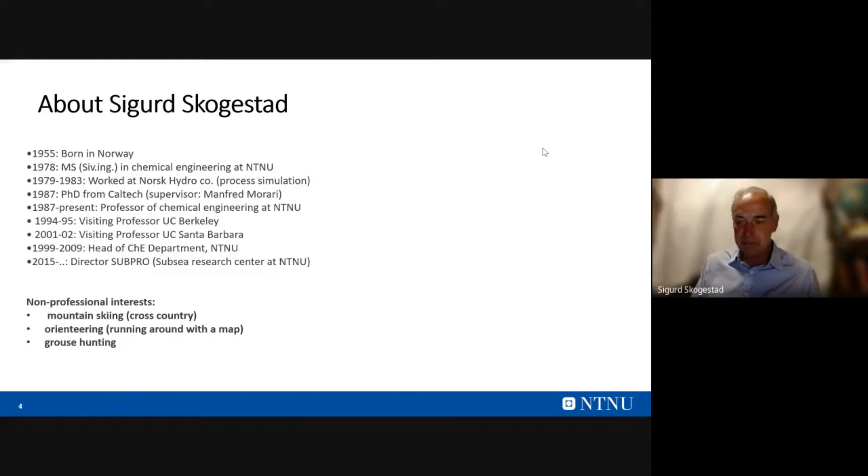Anyway, let's get into the talk. I have my homepage, which has been running since 1996, still running. There you can find one quote from me: that the goal of my research is to develop simple yet rigorous methods to solve problems of engineering significance. That has been my goal for my work, to combine theory and practice.

Now, what I present today, I think, is not really so much in the wrong direction. It also makes use of a lot of things that have been presented by people in control theory.

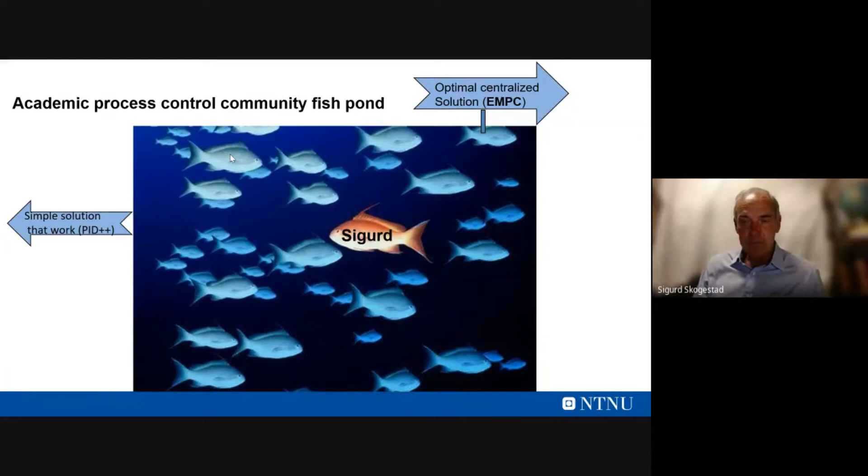So, to introduce the topic, I've observed from industry that they frequently use model-based calculation blocks, and they also use a lot of cascade control. But when I look at what they've done and ask them why, they don't have a good answer.

There's not really any theory behind a lot of the things they do. So I've been searching for this theory, to make it easier for engineers to use the right things. One idea is to use nonlinear model equations to derive control strategy, to derive control structures with embedded knowledge through input transformations.

This is very much related to what's called feedback linearization, a nonlinear control theory that became popular around 1990. It has not been used a lot in process control. So the primary use of what I present today will be in nonlinear feed-forward control, nonlinear decoupling, and also insight into how to use cascade control.

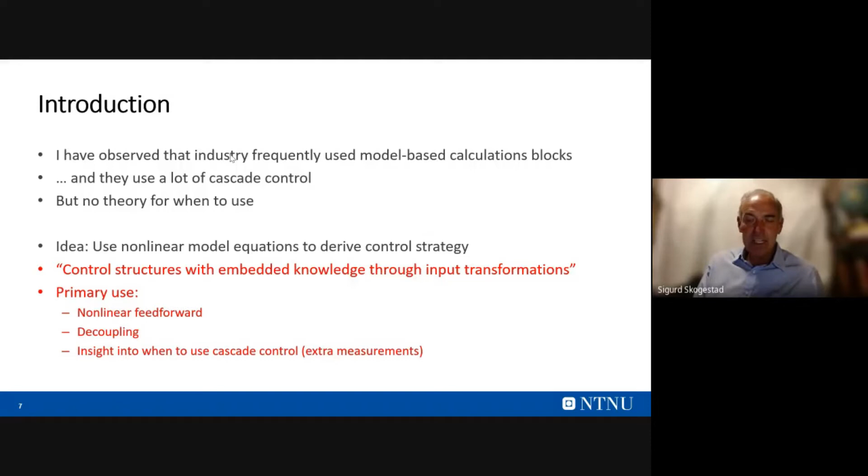Now comes a slide I think is very important. It gives you essentially the main idea of everything, so I think you should concentrate on this slide and try to understand what I'm doing here. If anyone has any questions, they can ask about this one. The main idea is really trivial, but it's almost magic.

Assume that you have this process given in red here. You have a nonlinear dynamic model: dy/dt is a nonlinear function of the output y, the input u, and the disturbance d. Now what you do is introduce some transformed inputs called v. So the original inputs are u, and I make some transformed inputs v, simply equal to the right-hand side of the model equations minus a times y.

A is a tuning parameter. You can select it equal to 0, then you get feedback linearization, but more generally it should be non-zero. So if you introduce this simple transformed input, you get your new transformed system, shown by the blue box here.

This is the transformed system after introducing this input transformation, and it looks like this: dy/dt equal to ay plus v. So if you look at this system, first thing, it's linear, it's first order, it's going to be decoupled if A is diagonal, and it's independent of disturbances.

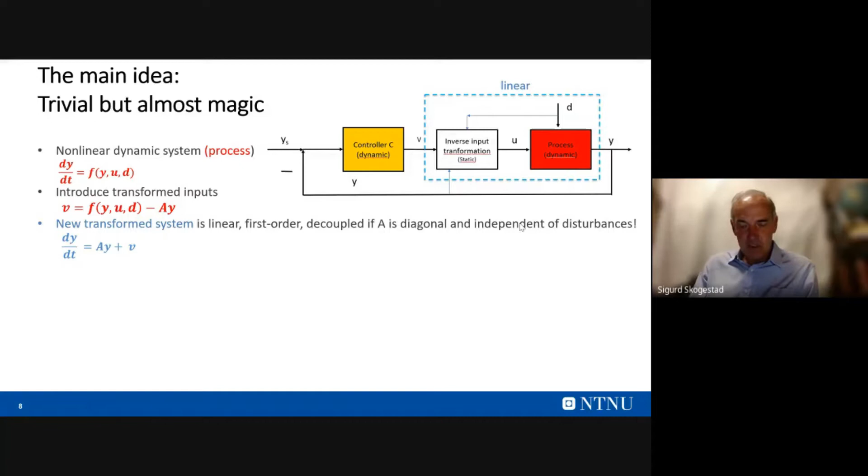So it's, as I said, almost magic. And how do you make this work in practice? Well, you need a static calculation block, this block here, which from a given value of v, from a measured value of disturbance, also based on the measured value of y, will compute the input.

And that's really just inverting this equation here. So you need to invert this equation for the transformed input. You have given v, you measure y and d, and then you can calculate u by solving this equation. We'll get back to how we can solve these equations - it can be analytically, numerically, or by feedback.

The value of v, that comes in here, is computed by a conventional controller, often a linear controller, for example a PI controller. And for perfect disturbance rejection, you don't even need this controller - you can just keep v constant, and then you can see from this equation that you have perfect disturbance rejection through this static calculation block here. So it's almost magic.

There are some assumptions. Of course, the first most obvious assumption is that you need to know the model, and you need to measure the disturbances. That's not often the case, but if you cannot measure all disturbances, it can still be useful - we'll see that. Another restriction is that you need as many outputs y as you have inputs u. So clearly this is restrictive, but we will lift this restriction later.

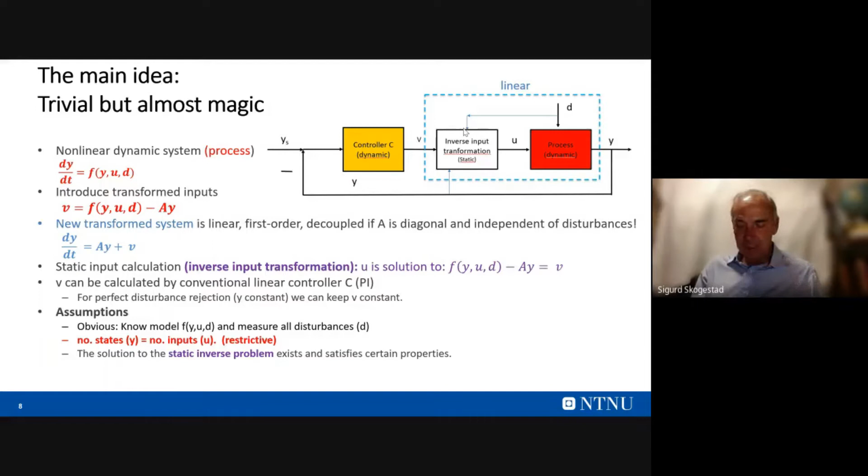Okay, so this is really the main idea. It's almost magic: you do this transformation, you have perfect feed-forward control, and it's very similar to feedback linearization, introduced by Isidori in the 80s.

You can see it's essentially the same thing. The only difference is that in feedback linearization, usually this function is assumed to be linear, affine in U, and also usually A is made equal to 0, so you get an integrating system. The name for this is feedback linearization, which I think may be a bit misleading given what it's actually doing. Maybe a more descriptive name would be nonlinear static feed-forward control and linearization with a little feedback.

But feedback is not really the main thing here. The feedback is this y, but that's not the main component in this inversion. The system is mainly linearized by static inversion of the nonlinear model f, and the most important property, probably for practical use in process control, is that it eliminates disturbances in a nonlinear way. Feed-forward control is not used that much in process control, and one important reason is nonlinearity, but this approach will actually correct for nonlinearity. Yes, there is some linearizing feedback from y, but not necessarily a lot.

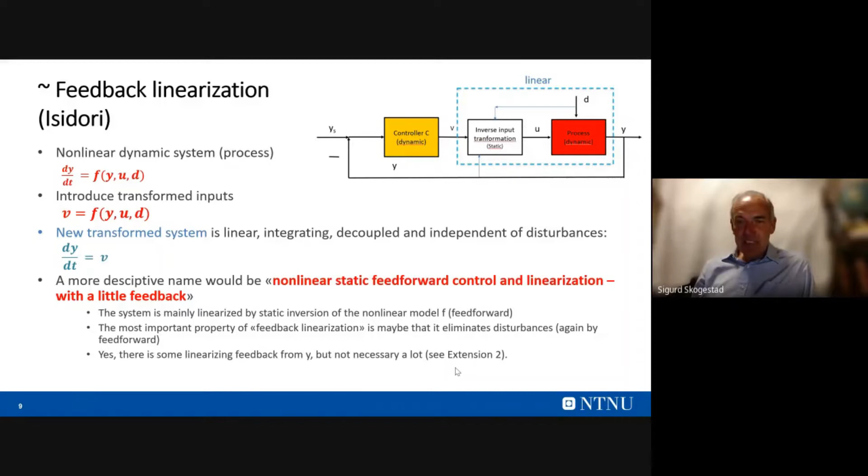Let me look at these extensions that we have done compared to feedback linearization. The first extension is that we looked at a more general function for the right-hand side. Normally in feedback linearization it's assumed to be linear or affine in the input, which seems a bit limited, but this assumption is not really necessary. It has some advantage when you do it this way, because then you can explicitly find the solution to this inverse, at least for the scalar case.

But in this talk we will use the more general function, and the transformed input will be, as I said before, the right-hand side minus A times y. We may need to solve this numerically rather than analytically, but that's not really a problem. Actually, I wrote an email to Isidori and asked him about this, and he said that originally they did allow for more general right-hand sides, but for some reason they made this assumption in the paper. I think he agrees it's not really necessary.

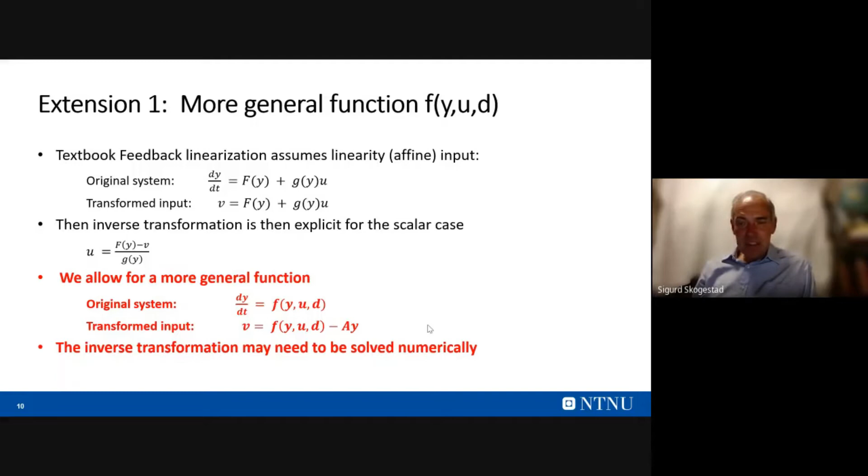The second thing which has puzzled me a bit is why they transform into an integrator. This is done by choosing A equal to 0. But if you think about what it's doing, it doesn't make too much sense, because by choosing A equals 0 you make this linear transformed system into an integrator, from v to y. This is how it looks: dy/dt equals v, a pure integrator.

The disturbances are eliminated, but if you think about what you want to do afterwards, you're going to design an outer controller. You need this outer controller also because there will be disturbances you don't measure, and there will be model error. You will need feedback from the measurement y compared to a set point, using conventional PI control to do this.

Correction for uncertainty - so what you will do, if you make it into an integrator, assuming you have a fast process and want fast control, is first use positive feedback essentially to make this system integrating. Then after making it integrating, you use fast negative feedback to move the dynamics back again, maybe close to where they originally were. So it doesn't really make sense that you first move it into the integrator and then move it back again. I think this is a limitation which is not really necessary.

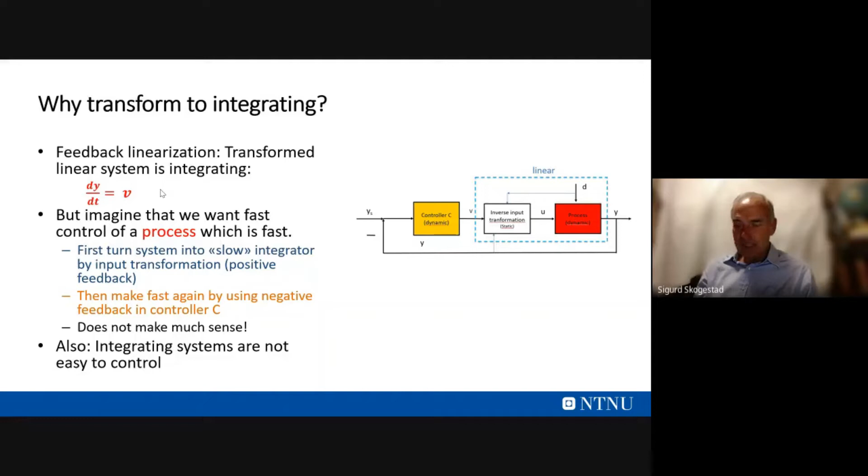So the second extension is to introduce this tuning parameter A. As I showed before, this is the original system - transformed input vA, and you get the transformed system, which is linear and first order.

So A can be used to get the desired dynamics, and the system will be decoupled if this parameter A is diagonal. A equal to 0 corresponds to feedback linearization. But one general idea is to select A equal to the derivative of f, the right-hand side, with respect to y at a nominal operating point, because then nominally the transformed system has the same dynamics as the original system, and there is nominally no feedback from y into this input calculation block. So this might be a good choice.

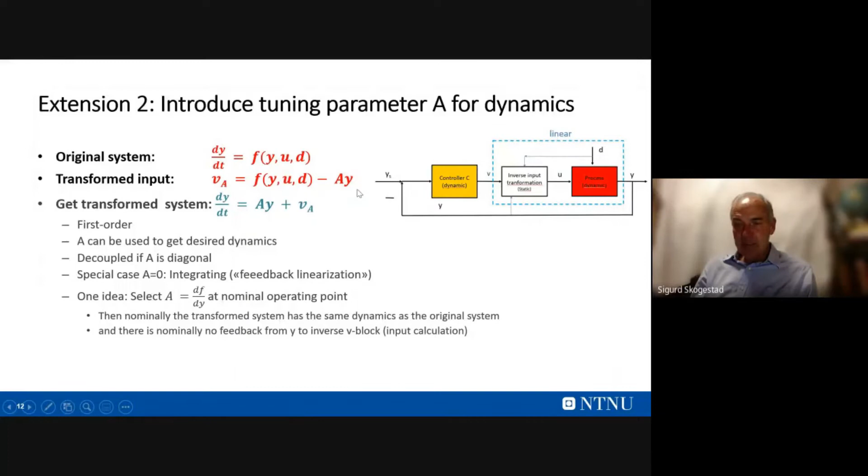But you can also use it to speed up the response and get any dynamics you want, really. Except, of course, you need to be careful if there's delay in the measurement and you speed up the response too much, you can have problems with instability.

There's a closely related transformation that we presented at the IFAC World Congress. Instead of taking V as F minus A times Y, you multiply this by minus A inverse and get the transformed variable, Y minus tau 0, which is minus A inverse times F. Then you get a transformed system in time constant form. The difference now is that with this transformed variable, you always have a steady state gain of identity matrix, which means that at steady state you have Y equal to VA0.

So it's very similar, but it has the advantage at steady state of making the steady state gain identity. Then we may, in theory, avoid the feedback controller completely. But that's only if you have no model uncertainty and you have measured all disturbances. Again, as I said before, the feedback control is needed to correct for model errors and unknown disturbances. But in theory, with this related transformation, you can get away with the outer feedback controller C completely.

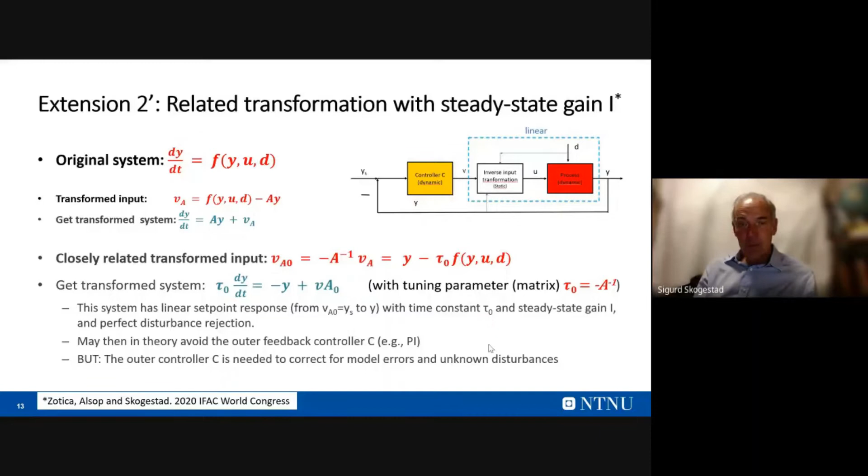So then another extension compared to feedback linearization is to consider static systems, which are actually very important in process control. For static systems, you typically have a set of nonlinear equations, and you select maybe one or a couple of the states X as outputs. This is very common, and it's not covered by the normal theory of feedback linearization.

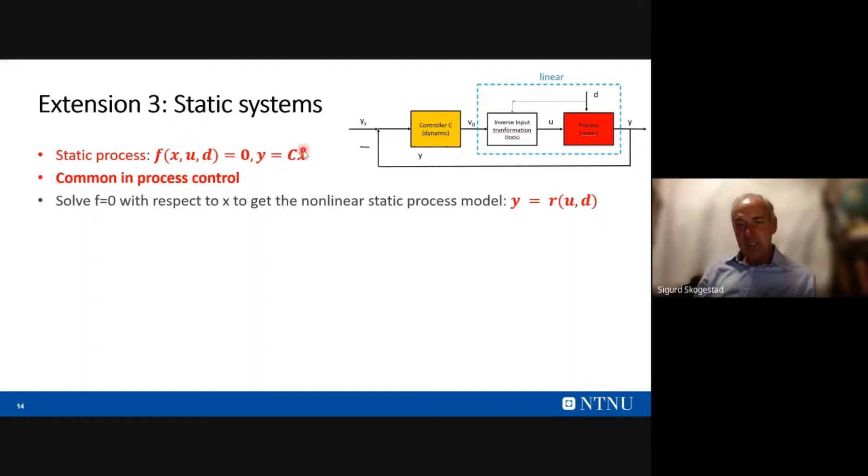But it's actually very simple to handle these systems in a similar way. What you can do is solve these equations with respect to X, eliminate the X's and substitute them in, and then derive the relationship directly from U and D to Y. You can write the equations in this form. Now all you need is to introduce R as your new transformed input, V0, and the new transformed system is going to be linear, static, and independent of disturbances. So the new transformed system is just Y equal to V0.

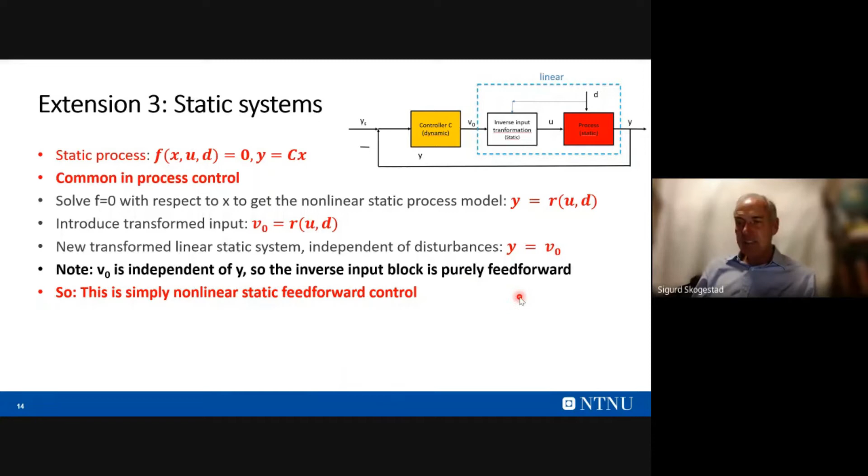This is similar to what we did before, but with a static system. What you note here is that this V0 is actually independent of Y — there's no arrow from Y into this block. So the inverse input block is actually a purely feed-forward block. This is really simple nonlinear static feed-forward control, which people have applied many times before. But I'm just putting it into the same setting as feedback linearization.

Of course, we need to assume that the solution to this static inverse problem exists and is unique, but this is usually satisfied for physically real systems. And if you have problems solving them, I will talk about an extension later, which is a trick to solve the equations by feedback instead of numerically, using an I controller, a purely integral controller. This may actually be a safer approach in many cases, because it's like a continuous solution of the equations.

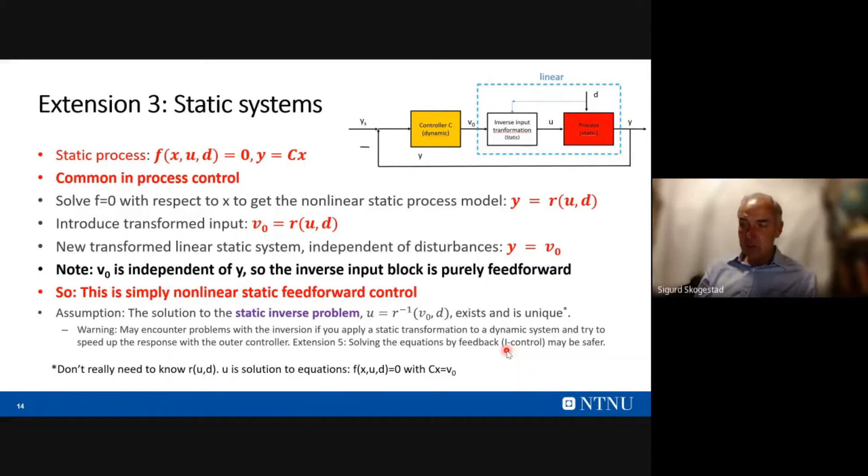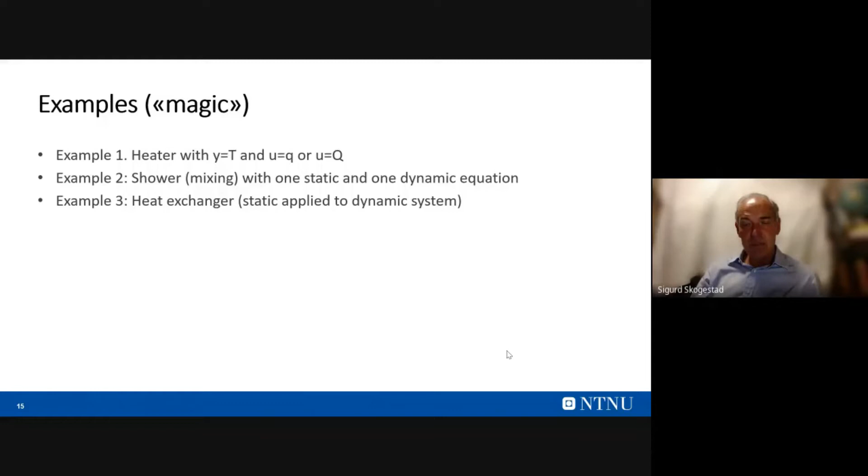Okay, so then let's look at some examples. I call this magic because you're going to just get some fantastic responses here. Look at three examples: first the heater, a scalar case, then an example with two inputs and two outputs, and finally a static model, a heat exchanger.

But let's look at the other choice of input, another one. That's going to be the heat input. So here you get this expression for the inverse. This is always well behaved here.

You can see that the input will depend on the value of VA computed by the controller. And so disturbances here will be the Q and T0. There will be some correction, essentially feed-forward action from disturbances into the input Q.

Now let's look at some simulation for the second case here. So the input is equal to the heat, and I want to control the temperature in spite of disturbances in the flow in and in the temperature in.

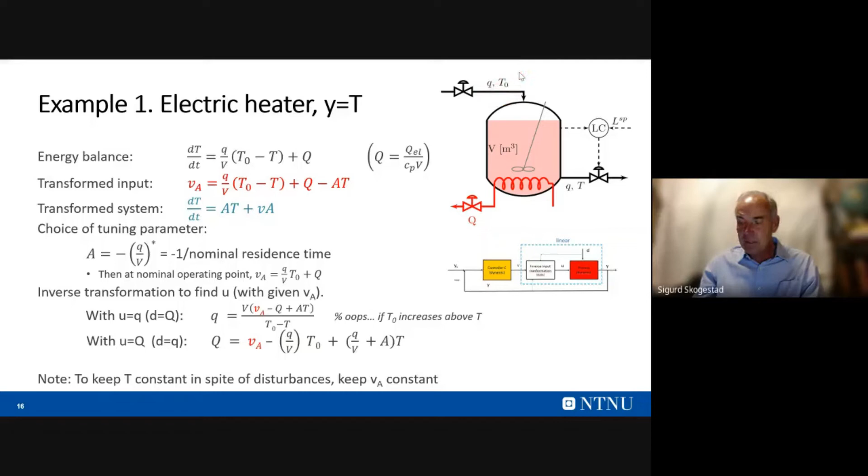So here I'm showing you the simulations. We have first a disturbance at T equals 100. There's a disturbance in T0, and you see VA is kept constant because we want to keep a constant temperature.

So VA, we're not using the outer controller at all. This is showing you that it doesn't use the outer controller at all here, but it changes the heat input based on just the feed-forward action from T0. And the temperature is kept constant.

So then at T equal to 2000 here, we have another disturbance. That's a disturbance in the flow rate into the tank. Again, the flow rate goes down to half its value, and heat input goes down to half its value, just by feed-forward action from this expression here.

This is the inverse input block. Finally, at T equal to 4000, I make a set point change, and then I'm actually using the outer controller to do this, to generate a change in V. So that's the change in V generated by the outer controller.

And this is the corresponding input you get, and this is the temperature. So you can see it's almost working like magic here. It looks almost too good to be true that the temperature is completely constant and the VA is constant.

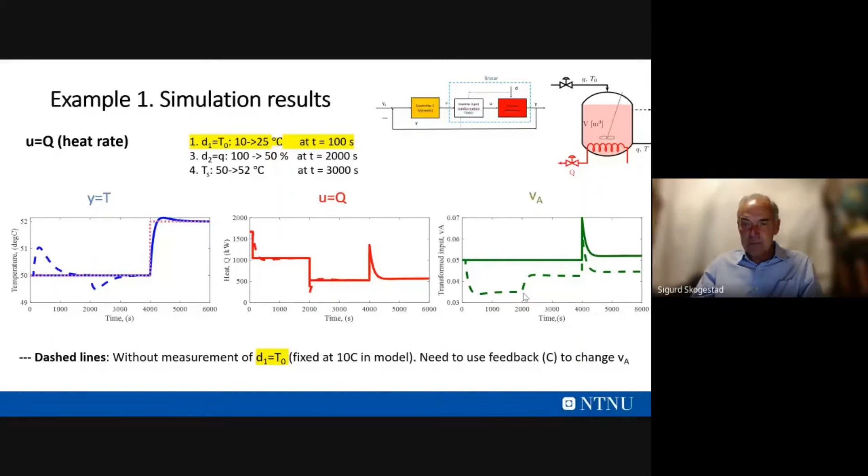Okay, so this was example 1. Let's go to another example. This is an example of a shower where we mix two streams to control the temperature of the mixed stream and the flow of the mixed stream. The input is the flow of stream 1, which can be the hot water, and the flow of stream 2, which could be the cold water.

So the mass balance is assumed to be static here. So this volume is constant. As soon as you put something in here, it comes out there. So it's a static mass balance. The total flow is Q1 plus Q2. The energy balance is dynamic, and this is just an energy balance here by mixing two streams.

So here we can define one transformed input for the static equation, just as the right-hand side here, and one equation for the dynamic equation as the right-hand side minus A times T. And A again is going to be equal to minus Q divided by V, the nominal minus 1 of the nominal residence time. So if you take these two equations, they are coupled, but you can solve them with a given value for V0 and VA, and find Q1 and Q2. So Q1 is this expression, and when you found Q1, you can put it into this one and find Q2.

So here again you see some problem with possible singularity if T1 is equal to T2. But of course it makes sense - if you have T1 equal to T2, there's no way you can control the temperature, since you have the hot and cold water at the same temperature. So it's not really a limitation in the transformation, it's more a limitation in the system itself. But of course you have to look out for things like this.

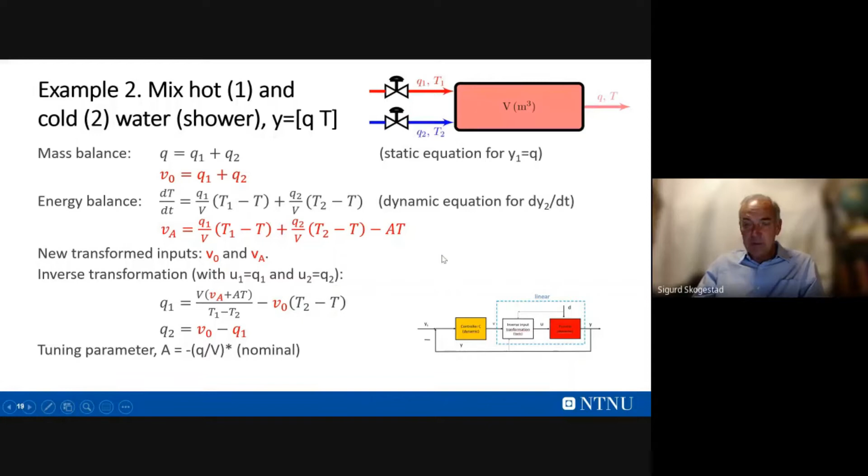So let's look at how it behaves in simulation. Here's the simulation with transformation only, so we're not using any feedback controller on the outside here. You can see we have disturbances first in T1, the temperature of the hot water, then the disturbance in the cold water, and then we make a set point change in the temperature of the outstream and the total flow. The way we do this: for 1 and 2 we keep V0 and VA constant, and for 3 I make a step in the VA, and for 4 a step in the total flow V0.

And you can see it's behaving wonderfully here. So we have the disturbance - this is how the hot and cold water is changing. The temperature remains constant for all the disturbances. And when you do this step change, this is the flow - total flow remains constant, and the temperature remains constant.

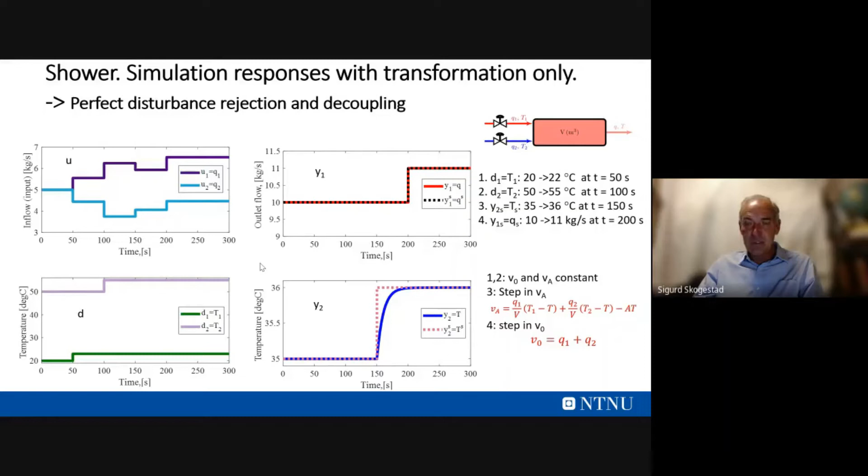This is for the step change in temperature, and you see it follows the residence time of the system. The flow is changed immediately when you make a step change. So again, this is working wonderfully. Now you might wonder how well it behaves if there's uncertainty, but we have looked at a lot of cases with uncertainty, and it behaves surprisingly well. Of course if it gets too much uncertainty it will not work that well, but there's no big surprises that we have seen so far.

So then let's look at the third example of a heat exchanger, a static one. This is just a heat exchanger that is countercurrent, and we want to control the outlet temperature using the flow of cold water to control the hot water temperature. Now the equations here are actually very nonlinear, especially if the cold water is the input - you see it enters into some exponents here. So this is the expression for the hot temperature.

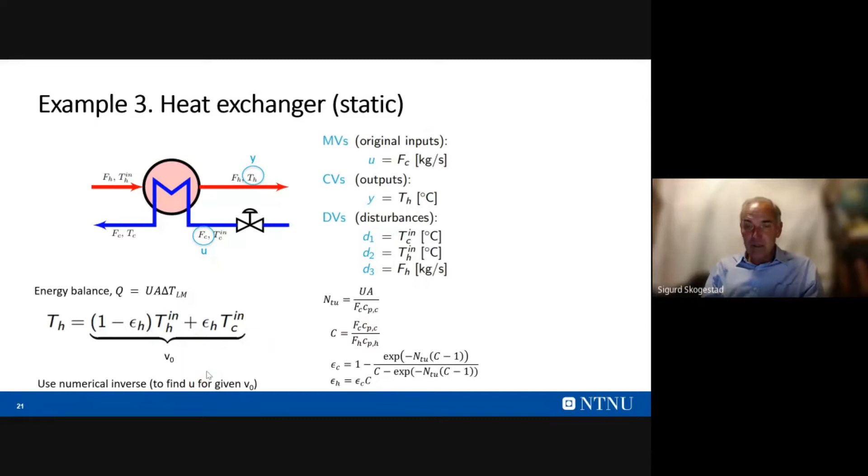This is sometimes called the epsilon NTU model. This is actually a very nonlinear model, and it's not easy to solve. So what we did, if we're given V0 and we want to find this FC, we solve these equations numerically.

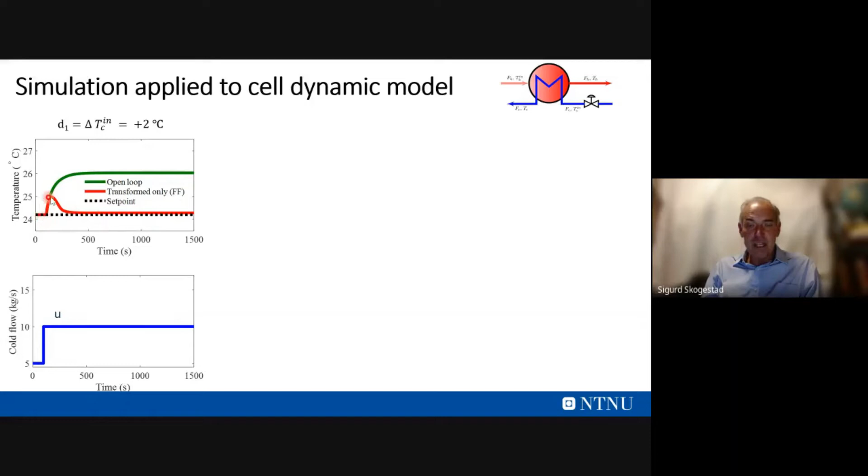I'll show you how it works when we apply this to the dynamic model. This is essentially static feed-forward control, nonlinear feed-forward control. Here you see for a disturbance in the cold water temperature, the temperature goes back again. Essentially, it's reacting immediately based on the feed-forward action. The reason temperature doesn't stay at its desired value all the time is because we're applying it to the dynamic model, and there's some steady state offset because the dynamic model isn't quite equal to the static model. In the static model we assume delta T log mean, but the dynamic model is a cell model which doesn't quite follow delta T log mean. But you see it's behaving very nicely, as you would expect.

Here's for a disturbance in the TH in. So here there's a bit of delay. You have a disturbance here, and it will take some time before it affects this one. But the feed-forward control is changing it immediately. That's why we're getting this inverse response, or wrong response, in the temperature. Otherwise, it's behaving very nicely.

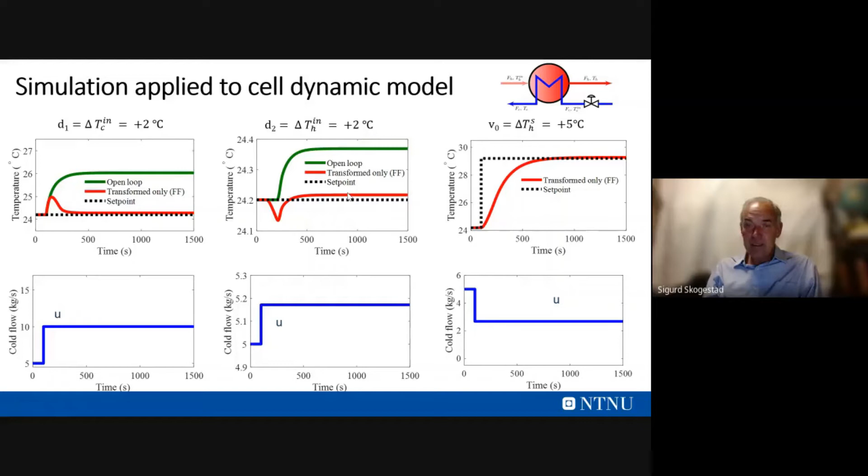And finally, here's a set point change. This is using the outer feedback control, and it's behaving nicely.

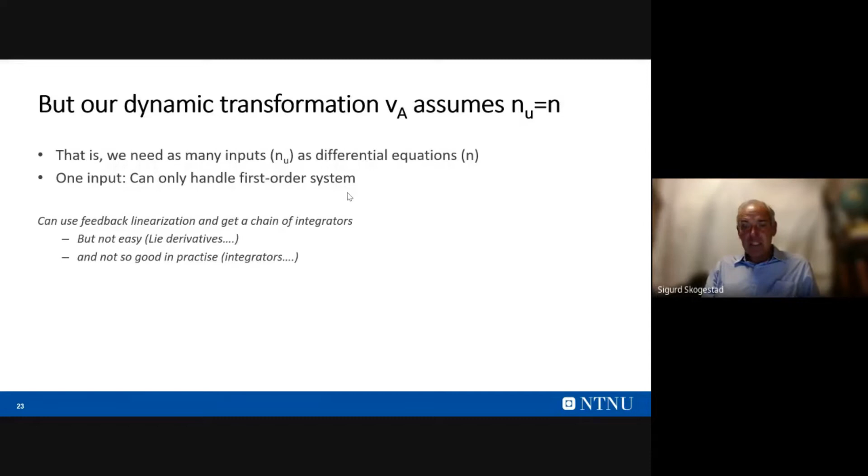So this is working great, all of this. But one big limitation is that it assumes we have as many inputs as we have states, and this assumption needs to be solved or avoided to apply this to many practical situations. You could use feedback linearization and get a chain of integrators, but it's not very easy and not very practical. So what we propose is simply to assume that we can have additional measurements.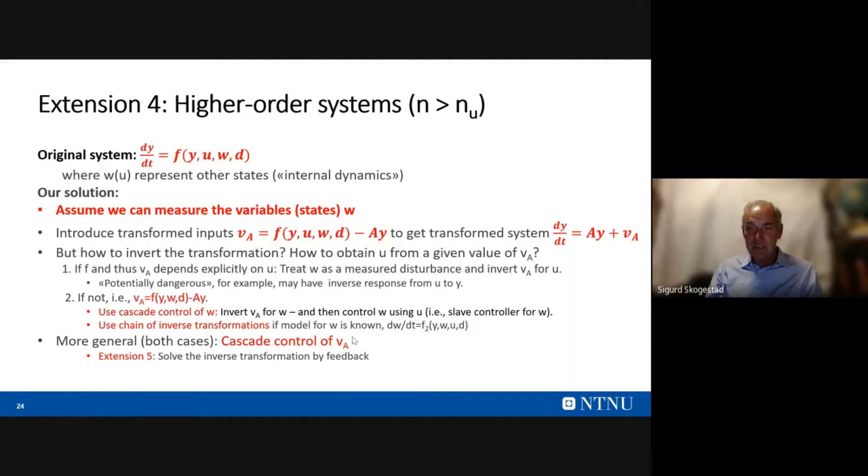So this controller is tuned based on experimental response from u to the calculated v, to include the possible w dynamics. If the slave controller can be made sufficiently fast, this will be the same as inverting the static input transformation. But otherwise there will be some loss, of course, because the slave control is not infinitely fast.

There might be other reasons why you want to use cascade control, as mentioned here. There might simply be some unknown parts in your right-hand side that you can measure. There can also be cases where you cannot invert the calculation — this inverse calculation is difficult — so you can use a cascade control block as a trick to solve this input transformation.

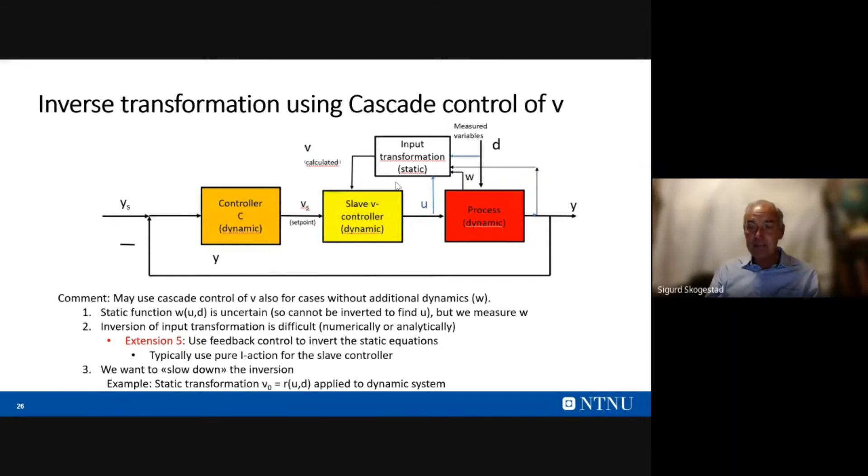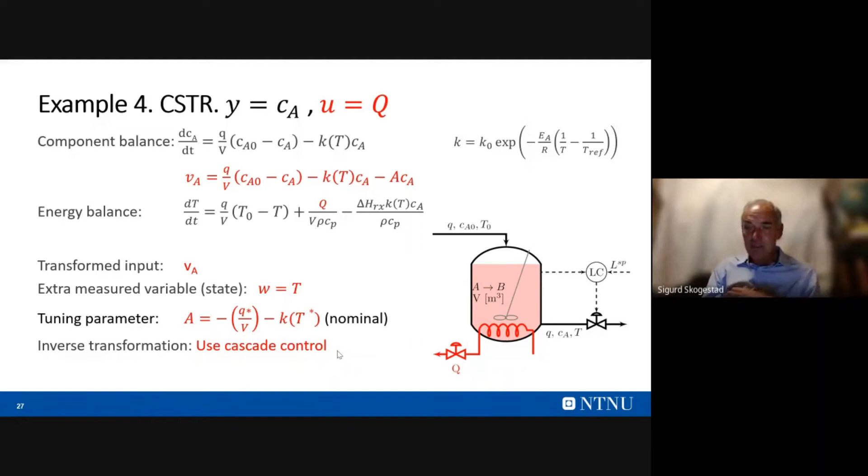So the first way of doing cascade control is to solve using this: I just calculate the right-hand side and then use a slave controller to change the heat input until this calculated value is equal to the set point. So that's one approach.

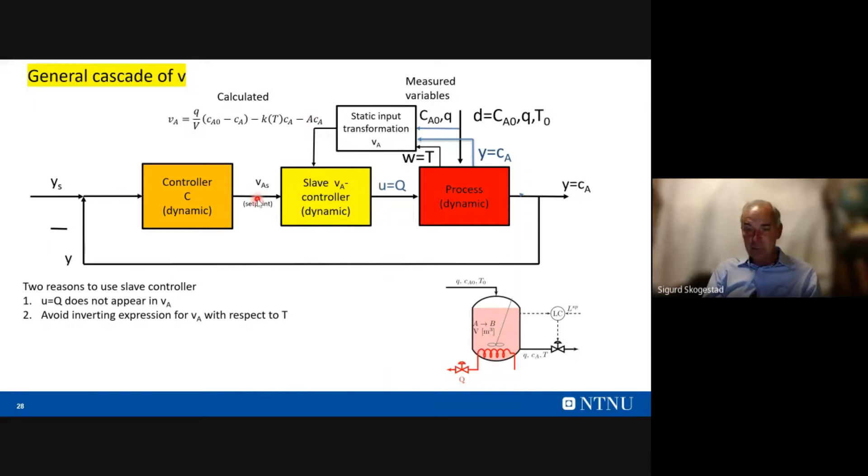But there are also other approaches. We could use cascade control of W here, of temperature. In this case, we need again the static input block, so we need to solve this right-hand side with respect to temperature, which requires some calculation. You get some expression which is a bit complex - not difficult, but a bit complex. We put that in here, get out the temperature from the set point, and then have a slave control for the temperature. So it's an alternative implementation of this cascade.

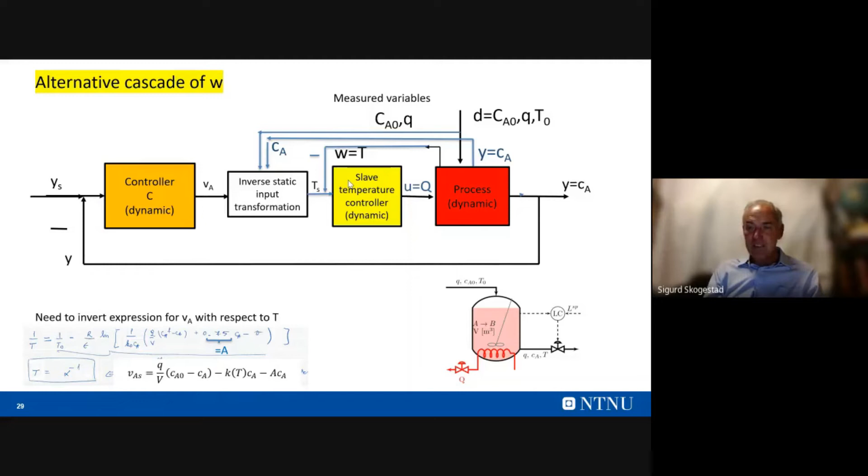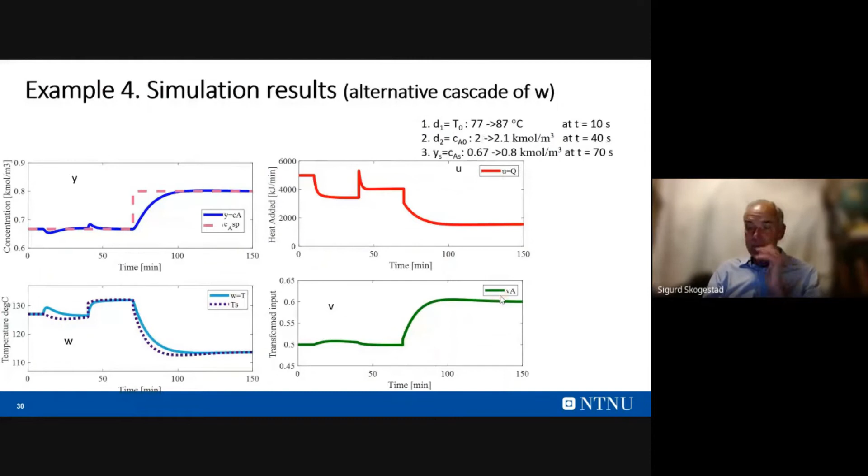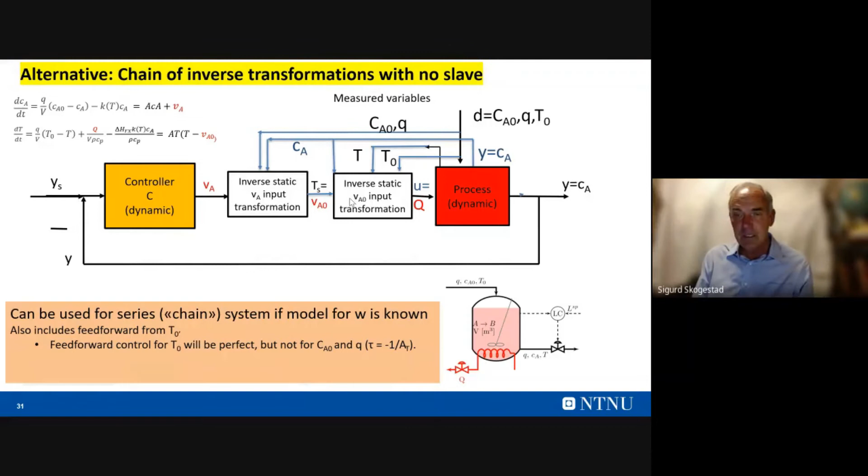There's also a third option here, which is to use two inverse static input transformations. Then I make use of the fact that I know the model for dT - I didn't make use of that before. Before I just used feedback, I didn't need to know this model. But if I know this model, I can use this as well. This might have some advantages, but I doubt in this case it's going to be worth it, because this gets quite a bit more complicated. But this is something that we are working on, comparing these different alternatives.

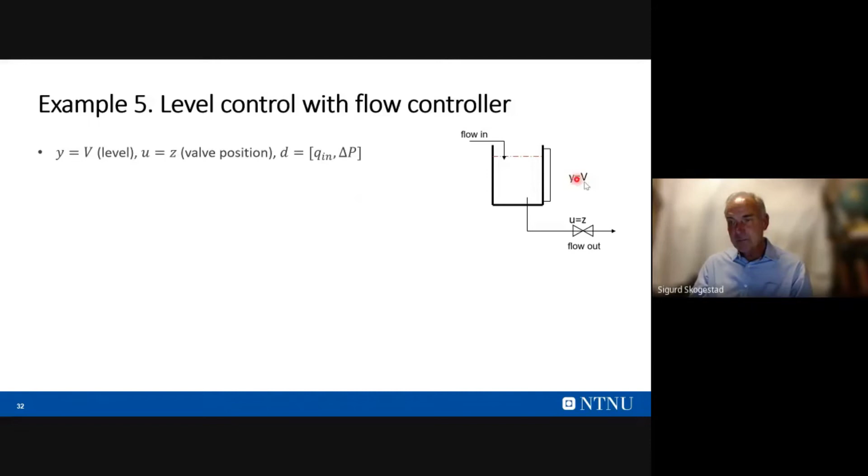So let me also show another way we can use this insight from the equation to design control structures which are more close to what people are doing in practice. Let's look at the level control problem. We want to control the level here using the flow out, so the input is going to be the valve position. We can make a nonlinear model here.

The mass balance is very simple: dV/dt, that's the volume of the tank, is Q in minus Q out. So I want to control the volume, that's the output. We have a non-linear expression for the flow out - this is the valve equation, which is non-linear. So this looks a bit complicated. We could use our standard method, define this f function, do VA and invert this and so on, but this gets very complicated.

Now, the insight that you can use here, if you're a good engineer, is that maybe this Q out we can measure, and I don't need to use all this complicated model. If I can just measure Q out, this can be like a W, and then I can just use cascade control, similar to what I did in the last example.

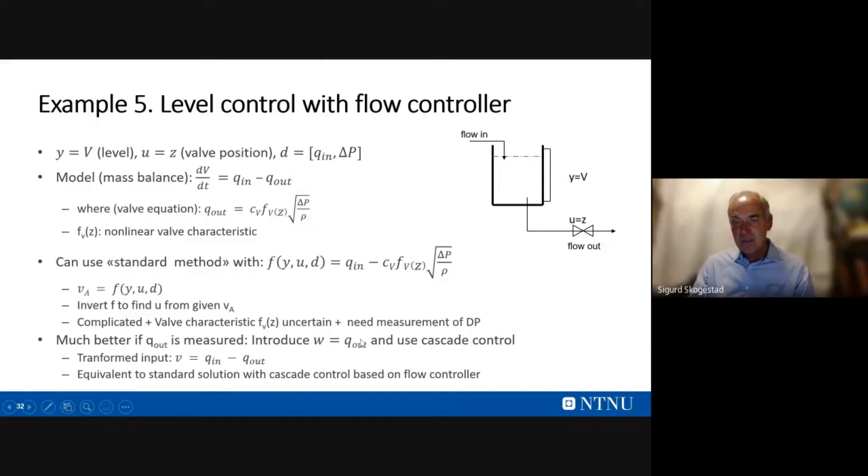So what I do now, I will show you here: we have the static input transformation, we compute V, which is Q in minus Q out. You remember V, that's the right-hand side of these equations. But this is an integrating process, so we choose A equal to 0 here - it's already integrating. Then we have a slave controller, and the slave controller adjusts the valve position until this computed V is equal to the set point.

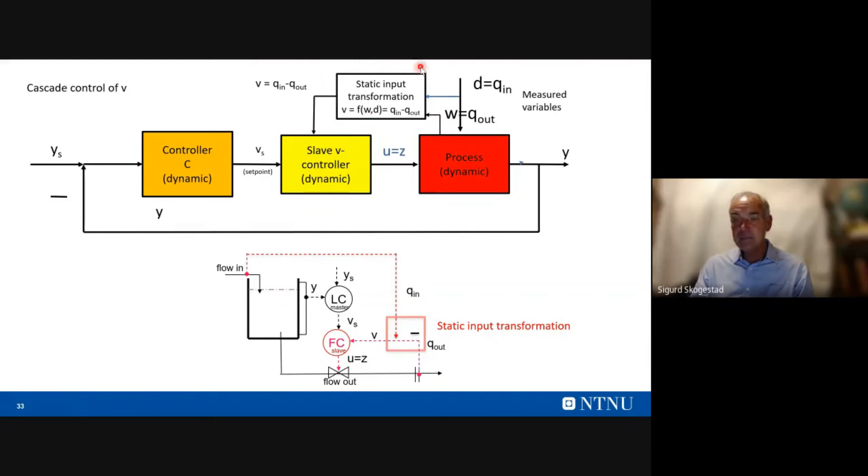So if you look at how it looks in the block diagram, in the flow sheet, we'll have a level controller being the master, a flow controller below, and this static input transformation is just the place where I take Q in minus Q out. This is extremely simple in this case - very trivial, but this structure is derived now not based on just intuition, but based on looking at the model.

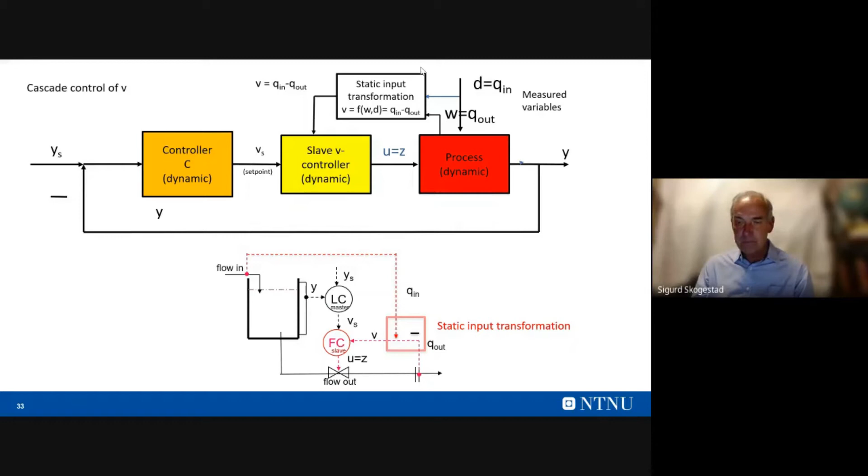There's also the alternative of having this input static transformation and doing slave control on W. Remember that W is Q out. It looks essentially the same, except now this inverse static input transformation is going to be this thing here in this case. Again, it's very simple because of the simple model.

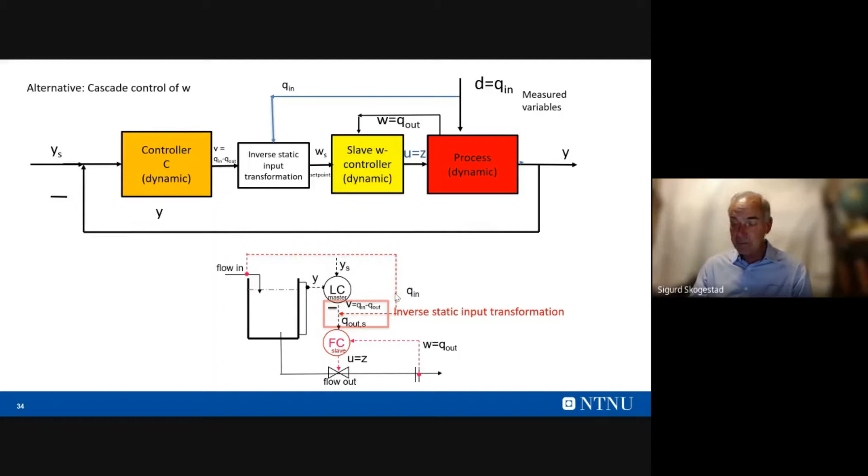So this is a fantastic approach, but there are some limitations. The input transformation works best if you have a dominant dynamic equation involving the output of interest. If you have one equation looking like this for the output and M is quite large, so you have slow dynamics at the output, then this method works well, but this does not always hold.

There are a couple of difficult systems. One is a heat exchanger. That's actually a difficult system, the example I showed, because there's no dominant dynamics in the heat exchanger - it's just a lot of cells that interact. So you can use the static transformation that I showed you. It works quite well, but it will only be correct at steady state, as we saw.

Another bit difficult example is distillation columns. Again, there is usually not any dominant dynamics there, maybe except in the column ends. So we can again get some insight into how to control distillation columns by using the same approach.

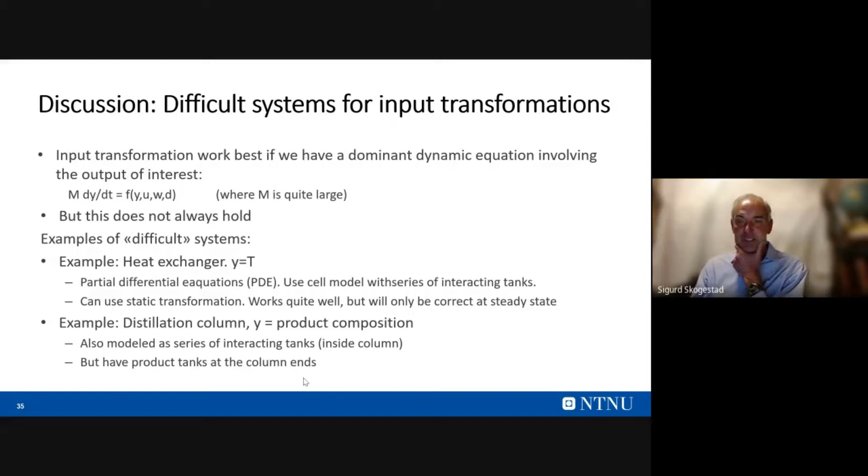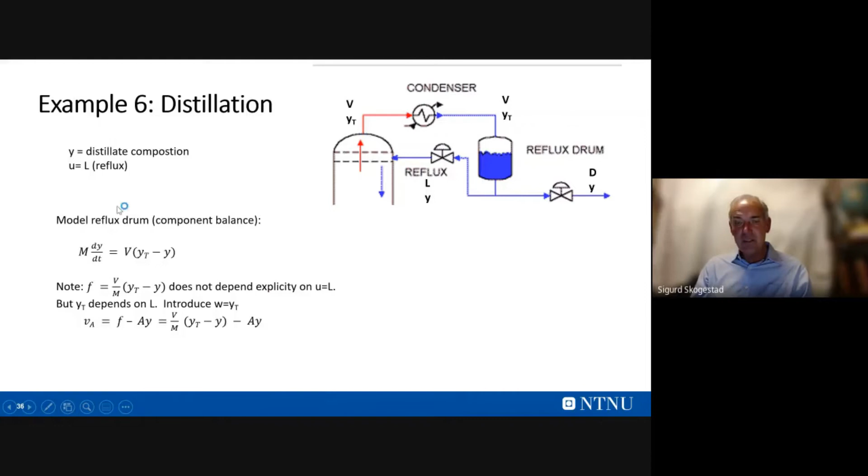So I'm looking at composition control of a distillation column here. I want to control the top composition using the reflux. We can write down the mass balance for the reflux drum: the change in composition is equal to what comes in, which is V, the vapor flow, times YT - that's the top coming from the top of the column - minus what goes out, which is V times Y. And L plus D is equal to V.

You note that this equation does not actually contain L at all, so you cannot solve this with respect to L. But the top composition, of course, depends on the reflux. So what you can do is introduce W equal to YT, and then you would have like a cascade control of the top composition. This is getting very close to what they do in practice.

Now the top composition is not easy to measure because composition inside the column cannot be measured, but you can measure temperature, and then you can use the very closely related scheme of cascade control of temperature. So by looking at this equation and doing a bit of thinking, you can almost arrive at this being the right way to do things in a distillation column.

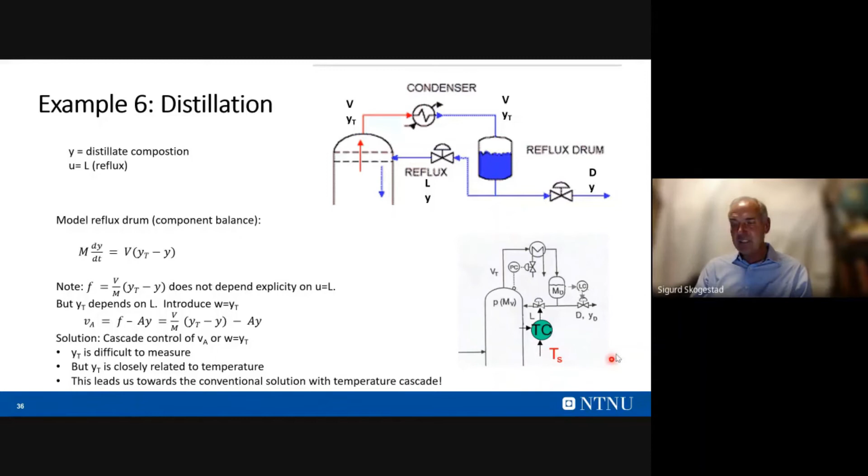Finally, a bit of discussion on feedback linearization and how this compares to what we've been doing. Feedback linearization is very powerful, but rarely used in process control, probably because of the limitations and complexity which people think are there. But actually the main idea is extremely simple, as I've been trying to show you in this presentation. And we have proposed extensions to overcome these limitations, as I've been going through.

Actually, these extensions are not really new. Maybe extension 3 on the static system, I didn't really see that, but the other extensions you can find in papers. It's not in the standard feedback linearization approach, but you can find it in a lot of more application-oriented papers. For example, in this paper by Khalil that I reference here, you can find extensions 1, 2, and 5 shown.

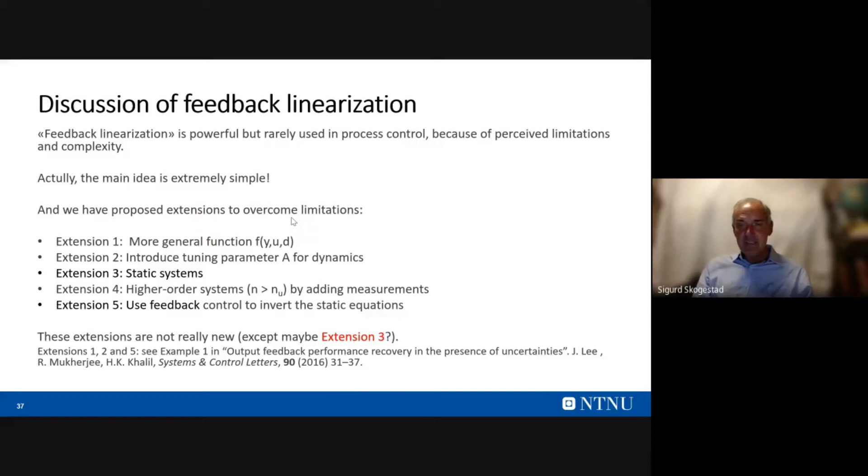This idea of using a tuning parameter is quite common. Using feedback control to invert the equation is used in practice. More general functions for F are used. And all of these things make this much more user-friendly for practical applications.

So finally, the conclusion. The basis for what I've been presenting is that we have a nonlinear process model for the output of interest, and we want to use this model to derive control structures. So the original input is U.

The trick now is to introduce this transformed input V, which is the right-hand side F minus AY, or we can use this closely related one, which has the advantage of a steady state gain of identity from V to Y. So the resulting transformed system from V to Y is linear and first order, with perfect disturbance rejection, and decoupled if A is diagonal.

It can also handle static models by using the right-hand side of the static model as the transformed input. So all of this is very simple, and potentially very powerful.

To make use of it in practice, it's very useful to introduce cascade control of V or W, particularly if you have these extra states, but also more generally this approach can be used. So it provides a systematic approach for deriving cascade control solutions.

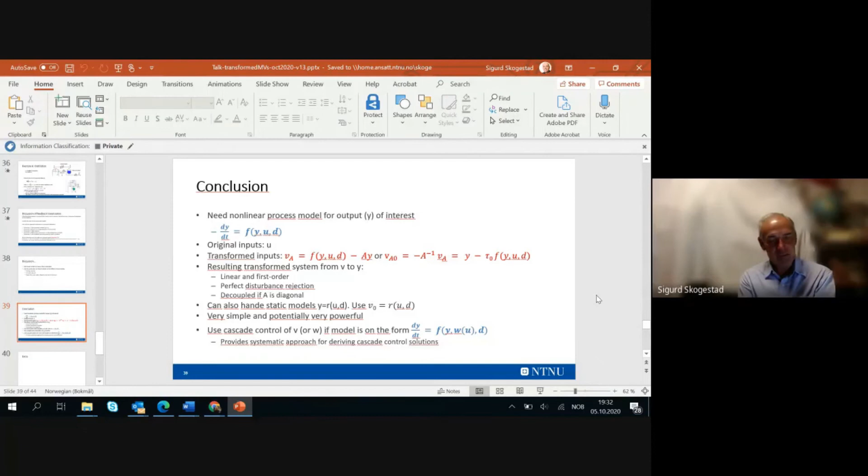With Hammerstein, I haven't looked into that. I can't really say. I think the closest for me is the feedback linearization approach, but I've never said this is really Hammerstein. But of course, there are static blocks there, so that's similar. But it's very similar, naturally depending on how you deal with this cascade control and how to deal with the nonlinear blocks to make the transformation.

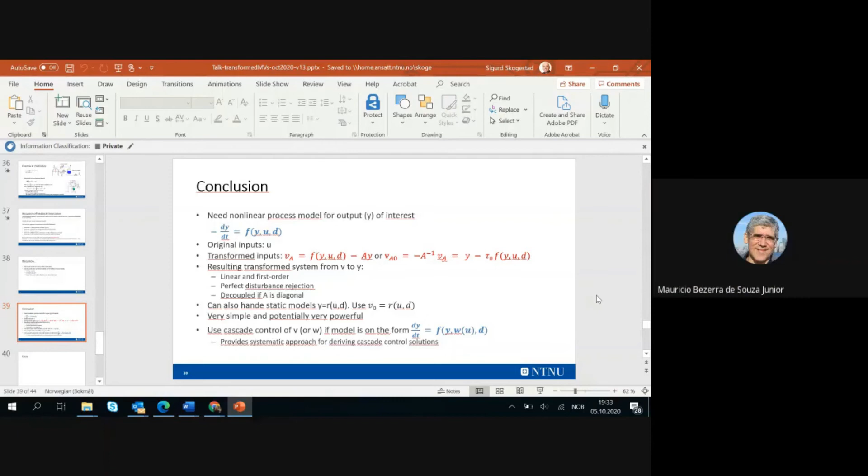And I agree with you that you have something called dynamic inversion. The industry, people do a lot of this nonlinear transformation, local nonlinear transformation for a set of variables or just a single variable. They do this nonlinear transformation, then apply a linear controller inside. So there's some ad hoc application in the industry, yeah. It's good to have some theory to explain what they are doing. It's a nice thing to do.

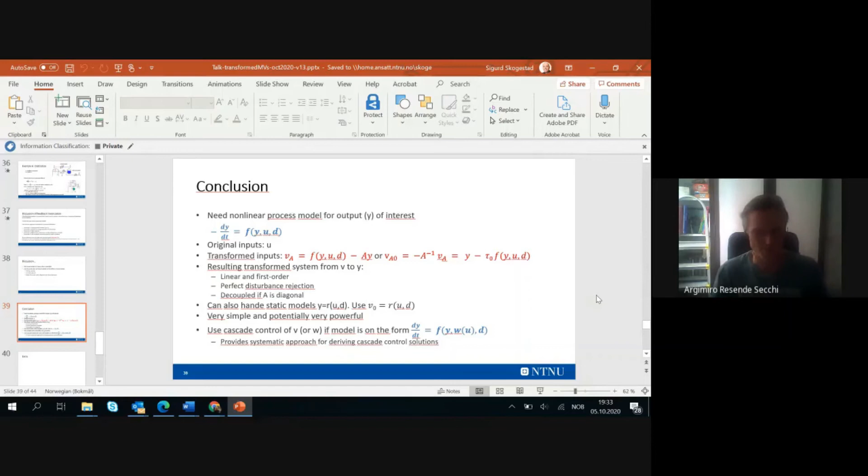But I think that for multivariable systems with much more complex models and so on, I think this Hammerstein mapping seems to be more natural to deal with these more complex interactions, and then try to do some control strategies to solve it. Well, just wondering about that.

And another question is about how sensitive this approach is to model-plant mismatch. You have told us that it's quite robust, but I think it will depend on the nonlinearities and so on, because these nonlinearities are explicit in this inverse problem. So it depends on the inverse gain that you have. If you have some mismatch, this will amplify the mismatch. So I'm not quite sure if this is robust for every case. It depends on the system and the nonlinearities. So what do you think about this?

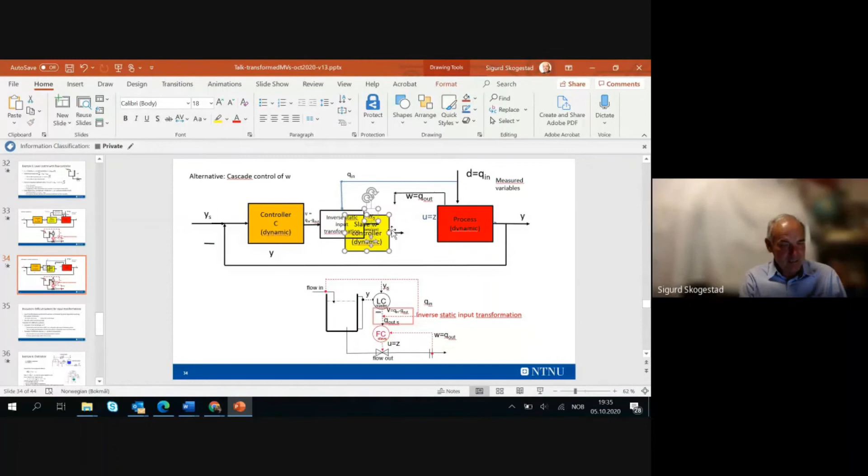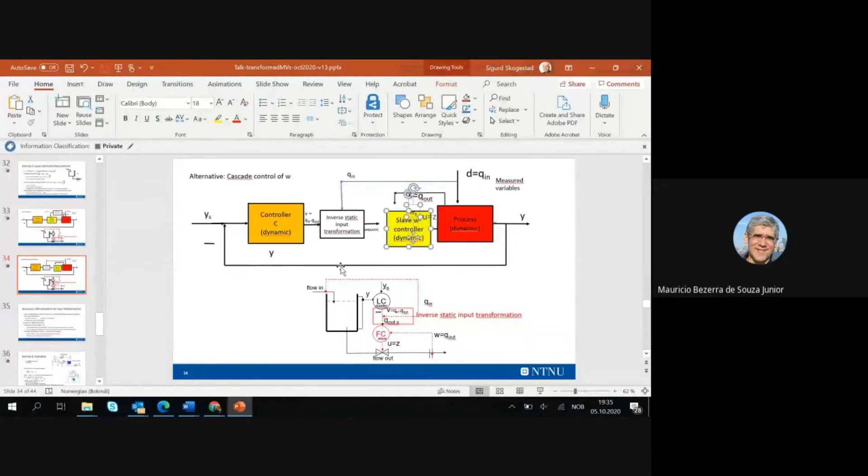Well, this has been my main doubt also about this, is the robustness. So there are some things, that's why we try to make this - are you seeing my screen now? Yes, we have this inverse block here, for example. So in this case, there's no... that's why I try to minimize the feedback from Y into this block, because we thought this was making a problem. But actually it turns out, for example, if you're making the transform system slower, then you're using actually positive feedback, and it turns out when you use a delay in the system, it actually makes the system more robust in some sense to gain error.

Because essentially the main problem in robustness comes from the feedback. So as long as you don't try to speed up the system too much by the transformation, there's no big problem.

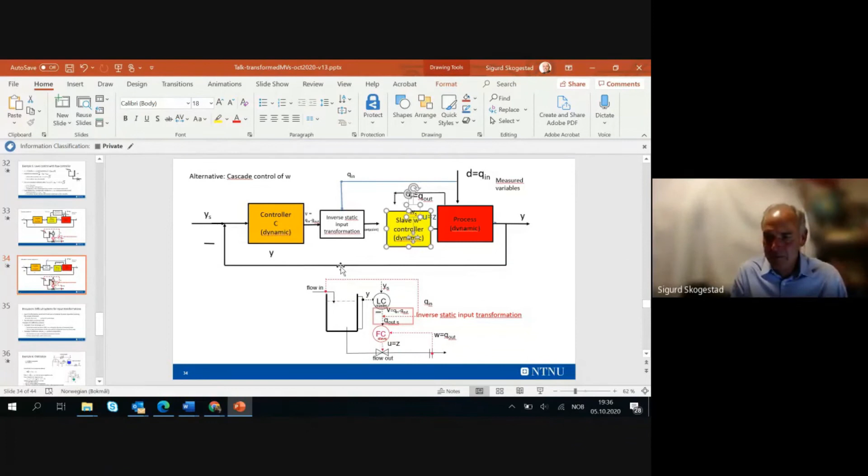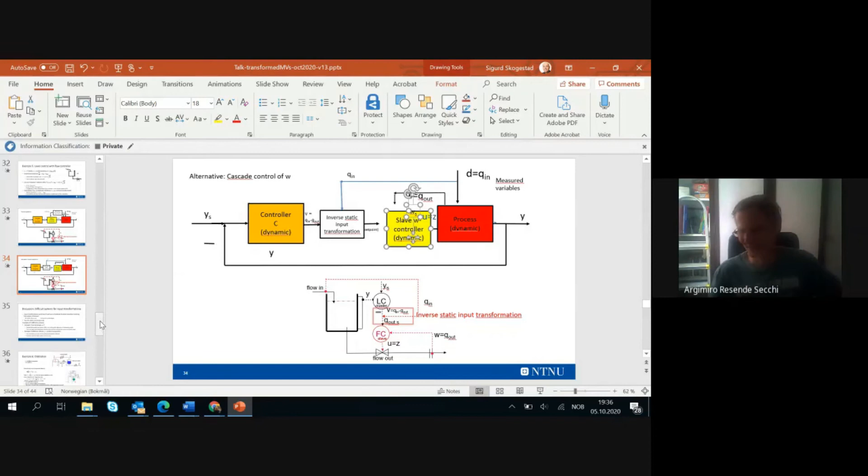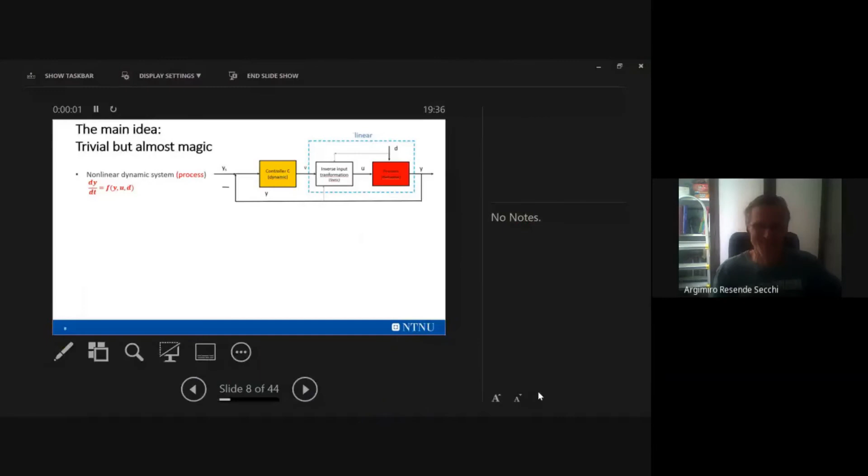Ingenious. All right. And the last question: what about when you have some multiplicity in the inverse problem? You know, you have many possible solutions for the steady state mapping, and how do you choose the solution to apply in the inverse problem?

Of course, this is something that can create problems, but usually this multiplicity will be a problem also for any controller. It's usually a property of the system. It can make problems in transformation sometimes, but this is why I was recommending to solve them maybe by just feedback using an integral controller, because the integral controller doesn't make any jumps in U. It will just slowly change U.

So it will not jump across a singularity, for example. So what you say is a problem that you need to take care of, but I don't think it's really special for input transformation. It's usually a problem coming from the control problem that you started with. So I think it can be solved in most cases.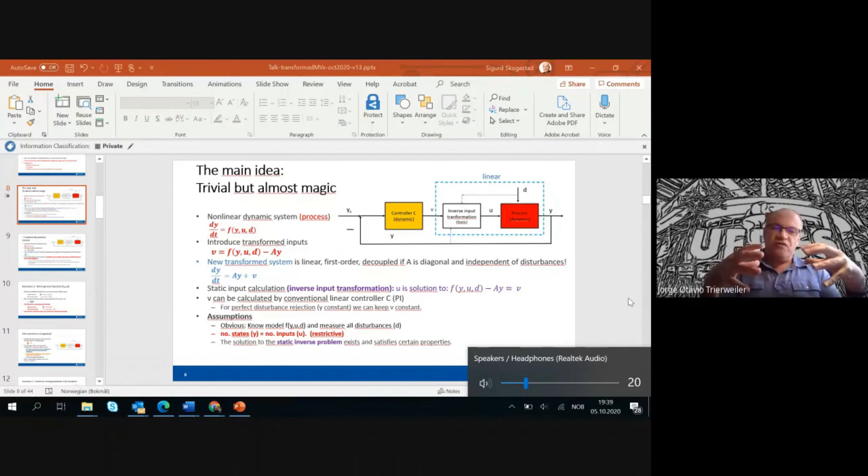And have you made any tests related to a state estimator? Because all your examples are very simple. But if we increase the number of equations of your model, you have more states, and then I think for the solution of the problem, the final equation, you need to include the state estimator in this approach.

Yes, there are many possibilities. Now, if you have very high order systems, you can use the static transformation, of course, like we did for the heat exchanger. So then you can have as many states as you want, because if you know the equations, you can always solve them, because you have as many equations as you have states, essentially. And you just solve them and eliminate the states, because then you're eliminating all the states.

Now, if you talk about the dynamic case, I really would say that it gets too complicated, and this is maybe not the right approach to use. I think the strength of what I present today is when you have quite simple models, but they still can be very powerful, because I've seen people using similar things in practice in industry. So I think just the thing that you can derive cascade control solutions and get ideas on this by looking at the model is very powerful. When it gets really complicated, maybe I would go to a completely different approach, like nonlinear MPC or something. I'm not saying that this approach should be used for everything.

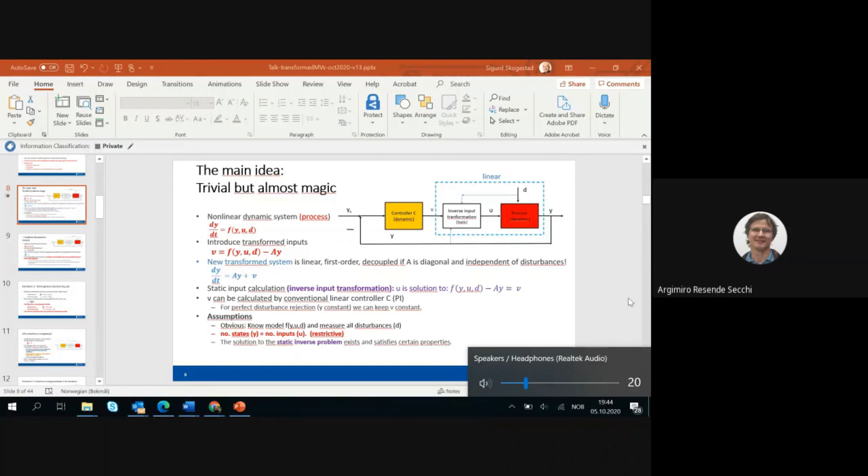Maybe I can complete this question, Rafael, because we had a PhD student who defended her thesis some years ago, Simone Miyoshi. I think Sigurd knows her. She did almost something like that. She made a nonlinear transformation in the input variables, then applied a linear MPC to solve the quadratic problem, and this nonlinear transformation worked quite well. So you use some nonlinear kernel to do the mapping, not just to invert the plant, but to do some nonlinear transformation based on some kernel, and then apply the linear MPC. So this worked well.

Okay, just to say one thing about what I presented today, I think it's probably most useful in quite simple cases. The idea is that you can put this into a conventional control system quite easily. The blocks I'm showing here don't require much, no special blocks and no MPC. You can use blocks that are already available in any control system to do what I'm showing you today.

And I think that's always going to be useful. There will always be problems that may be more complicated, and then you have other tools. So this is like one thing for your toolbox. It's not solving all your problems, but it's going to be very useful for solving some of them. And maybe it makes a systematic approach to many of the things that people are using today. Yeah, okay, I agree with that. Thank you, Professor.

Yes, thank you, Rafael. Sigurd, do you think you could also use other blocks related to dynamic compensations, like, for example, a Smith predictor compensation or inverse response compensation, in terms of when they happen, that would make the inversion easier?

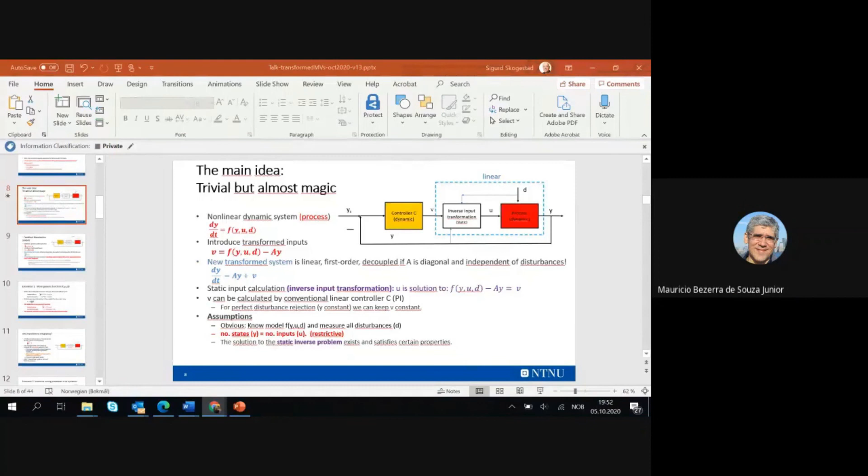I think he is having problems. Argimiro is having some problems with the internet. You are not listening. Now we are listening to you. Yeah, my internet's not good here these days.

But I was saying thank you, Sigurd, again, for sharing his knowledge with us here. It's a lot of experience for practical application of control systems, with simple and efficient ideas to solve hard, difficult problems. So thank you very much, Sigurd.

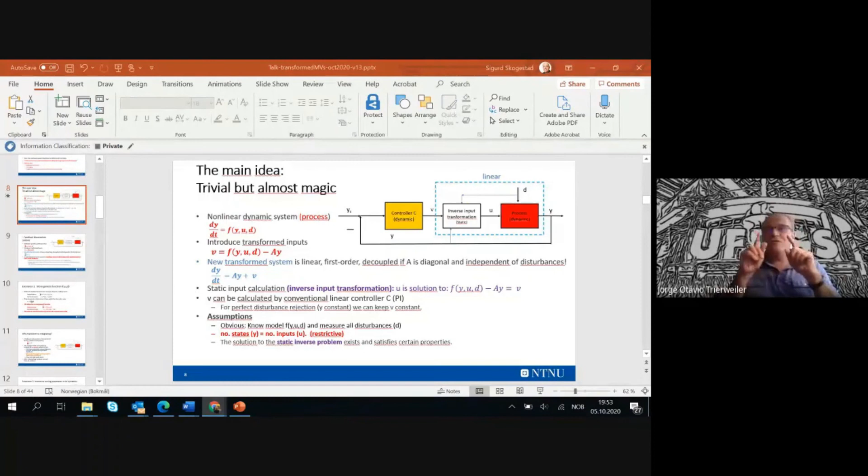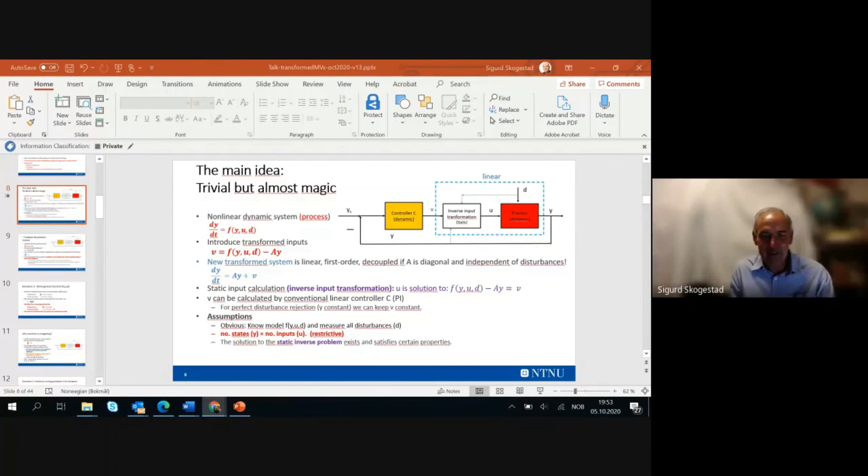Thank you for listening. I don't know if Jorge, you want to say something? Thank you very much, Sigurd. I would like only to say that you are not the only fish going in the other direction, I think we have more fish going that way. Hope to get some more fish following me, yes, I'm not completely alone. It will begin a school of fish, as they say.